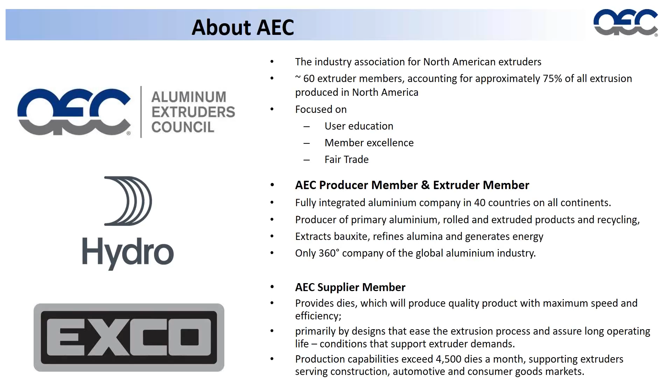Today's webinar is Introduction to Extrusion Dies, presented by Richard Dickson of Hydro Aluminum Metals USA and Rick Liscomb of EXCO Canada. Richard Dickson is Director of Customer Training and Development with Hydro Aluminum Metals USA. He has more than 30 years experience in the aluminum extrusion business.

Richard is an active member of the AEC's Die Committee and the ET Seminar Committee, which directs the program for the longest running aluminum extrusion technical conference, the International Aluminum Extrusion Technology Seminar. He also serves on several Aluminum Association and ASTM technical committees. Richard is the editor and co-author of Hydro's Die Design and Manufacturing Manuals. As leader of Hydro's International Die Team, for many years he drove the effort to create and refine ever more productive die designs. Richard's passions remain advancing extrusion beyond its current limits through understanding and education.

Combining extrusion and die design with the former Alcan, now Rio Tinto, and EXCO, a global designer and manufacturer of dies, Rick Liscomb has been part of the aluminum extrusion industry for 40 years. He has held various positions from janitorial through to upper management. The die side of his career has ranged from production design through to many die development teams. Rick has also been an active member of the AEC and has served on AEC and ET seminar committees.

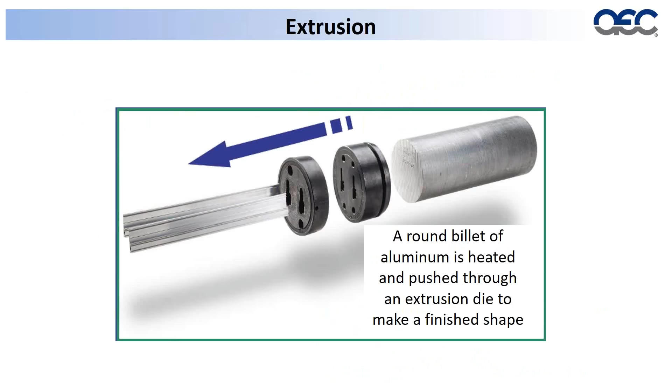Extrusion, meanwhile, is a relatively cheap initial setup cost. The die can be just a few thousand dollars, and you can have a prototype on your desk within a week or so - much quicker, much simpler than roll forming. But its great strength is it allows you, the end user, the architect or the engineer, and people in the industry using extrusions, to use your full three-dimensional creativity.

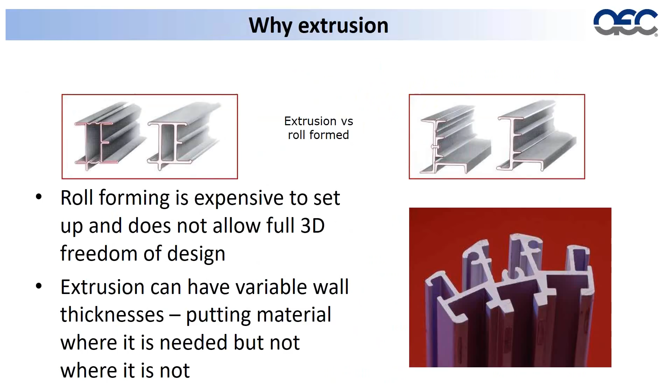It can also open up your creativity. Here is a group of extrusions designed to all slip together. Drilling a few screw holes means you can make a very strong, structurally sound component from interlocking extrusions. This again reinforces the ability of the end user to use three-dimensional creativity to produce the end product.

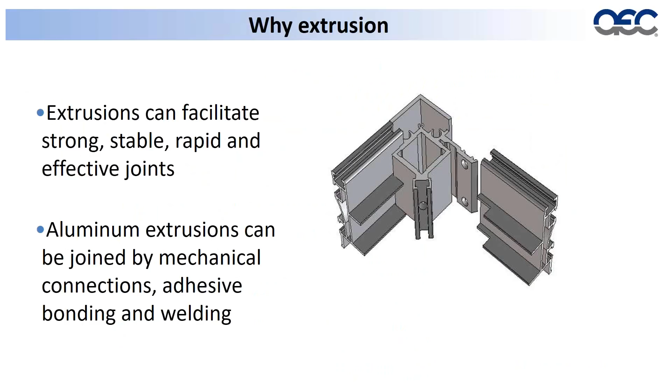Aluminum can also be joined in many ways: mechanical, adhesive, bonding, and welding. So there are many ways to bring these structures together, and it really frees up the creativity of the end user. Let me show a couple of examples.

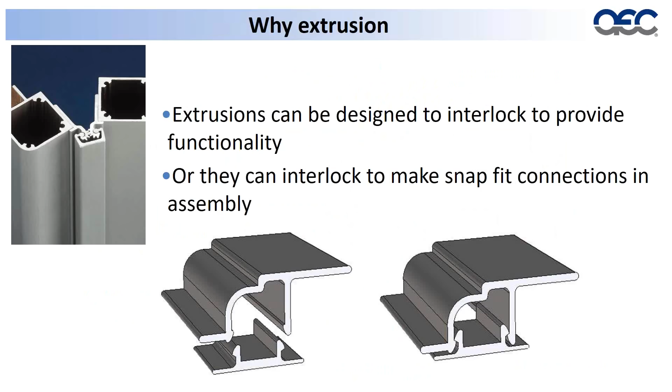So as we can see, the world of extrusion is changing more and more. Back in the old days when it was rod and bar, we had one system to use. Today, getting into more complex shapes, we really have to start changing our attitude and communication patterns to the way orders are placed.

Traditionally, what does a customer want? A customer goes to a purchasing manager to call the extruder, normally has a shape with a tolerance requirement, and the extruder gives the customer the product he wants to end with. Then over and above that, the properties and surface finish become a discussing point - what's exposed, what isn't, and whether they want close tolerances or special surface finishes.

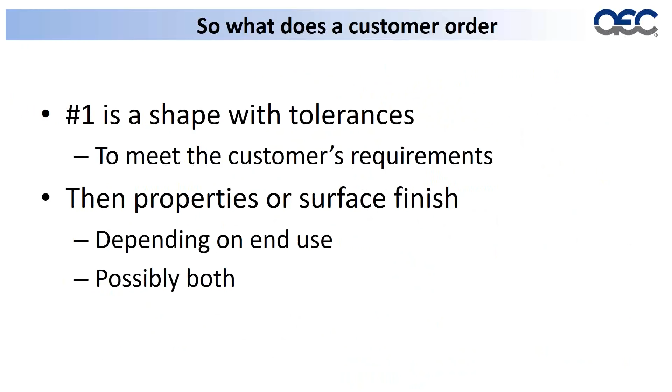Well, the problem today is when people order tooling that's out of standard, there isn't a possibility to communicate and improve it for both sides.

So really, what does a customer buy? Essentially the customer is renting the press time and the expertise of the extruder. Difficult shapes extrude more slowly - the more complex they are, the slower it can be, and the more time it requires. As we build in this complexity, the cost of the extrusion has to vary, because the extruder has to pay for his equipment, and nobody wants their supplier to go broke.

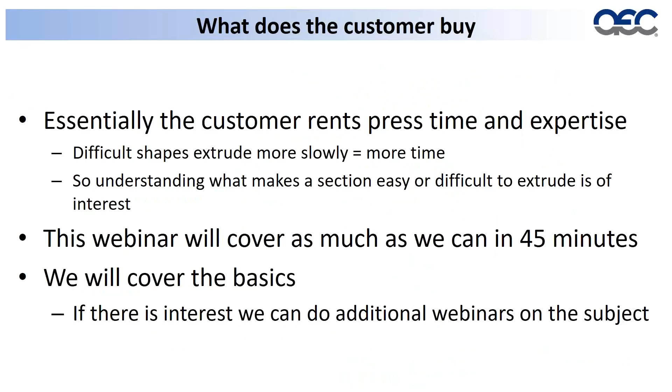Understanding what we can do to improve the productivity of a shape becomes a very important step in today's shapes. This webinar is going to cover as much as we can in 45 minutes, but as you can tell, that will be a limited amount. If there's a lot of interest for additional information, Richard and I would be willing to do another one that gets into more specifics and gladly see what we can tackle and help anybody with.

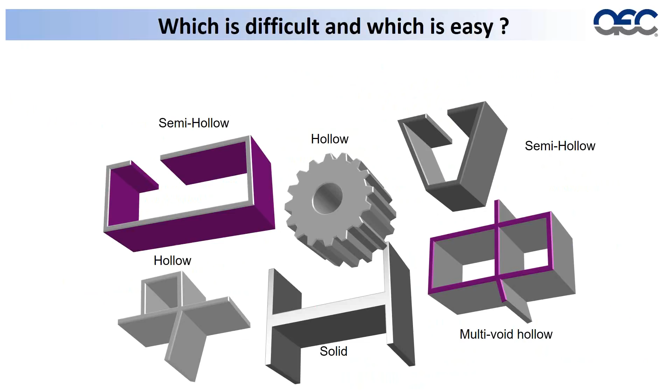Before we can get into determining which shapes are easy and which are complex, we have to know more about the dies and the problems that come from extruding non-standard shapes. Steel looks really strong and aluminum looks really soft, but it takes a lot of pressure to push aluminum through the die because of the reduction ratio from a very large diameter log down to the small, thin shape coming out the other end. When we look at the loads and temperatures involved, it's a different type of beast, and most people don't realize just how much variation there is.

Extrusion is like a tube of toothpaste. If you picture a tube of toothpaste, you put pressure on the end and a round rod comes out onto your toothbrush. If we change the configuration of the hole at the end, it would come out as whatever product we want.

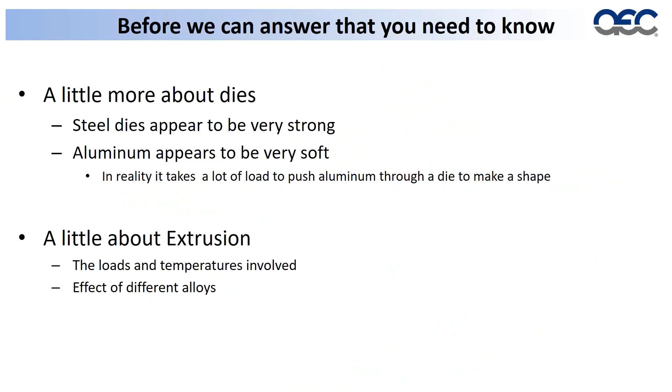Within the process itself, we have solid dies, which are relatively simple with much lower tooling costs. Then we have hollow dies, which involve a lot more complexity in the flow patterns, and the tooling costs are higher.

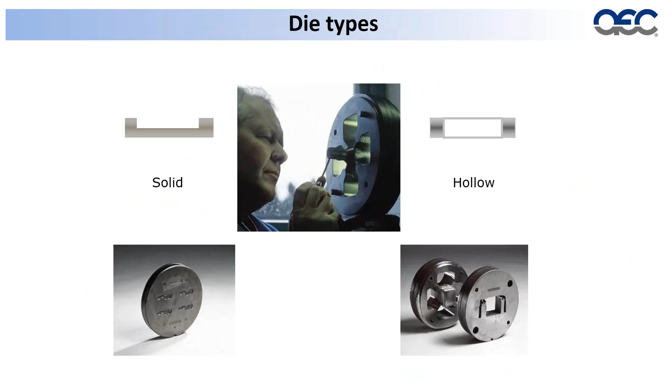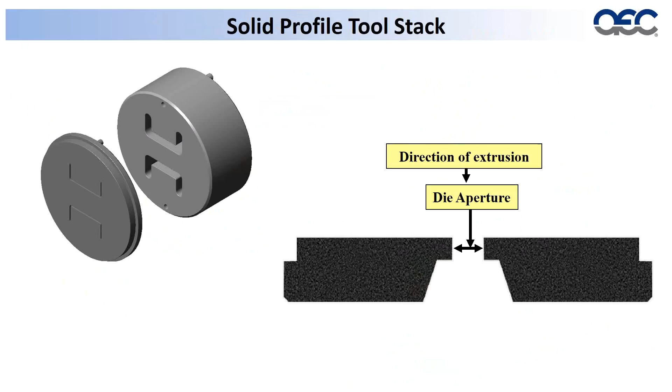When we look at solid profiles, the extrusion direction is from top to bottom. The aluminum goes through the die aperture, and as it passes through, it's rubbing on what's called bearing, which controls the velocity, because aluminum loves to stick to steel. That frictional work controls the velocity of different apertures or different size apertures within the steel, and that's essentially what you end up with: a solid shape.

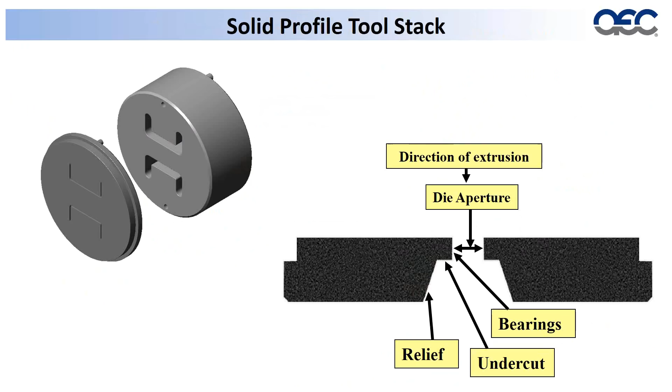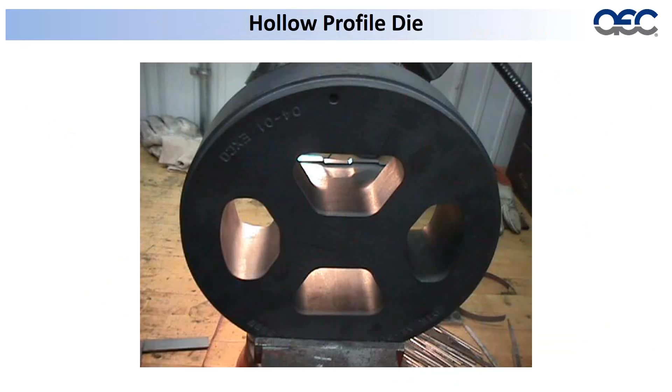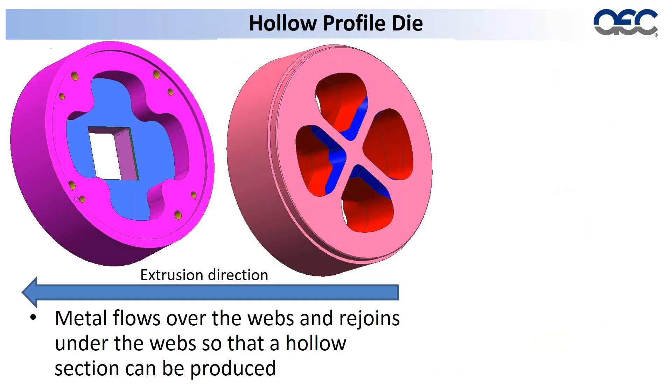When you look at hollow profiles, the dies become much more complex, as it's a three-step operation. The material must go through the ports, down along what we call bridges, which suspend the mandrel. The material meets together in a welding chamber prior to the aperture, adheres to itself, and then extrudes out over the suspended mandrel and the die plate, which forms the outside of the shape, both sides having bearing. It extrudes out and you end up with a hollow section, with the open part in the center being relatively any configuration you want, but it takes a slower extrusion speed and a lot more pressure.

As Rick says, there's a lot of work going on here. The metal goes over the web, through the ports, then is joined together again under the bridge and arm, and goes through another die plate, which has the mandrel on the outside. So you're starting with an 8 or 10 inch diameter billet, squeezing it through these small holes, and it takes an amazingly large amount of force.

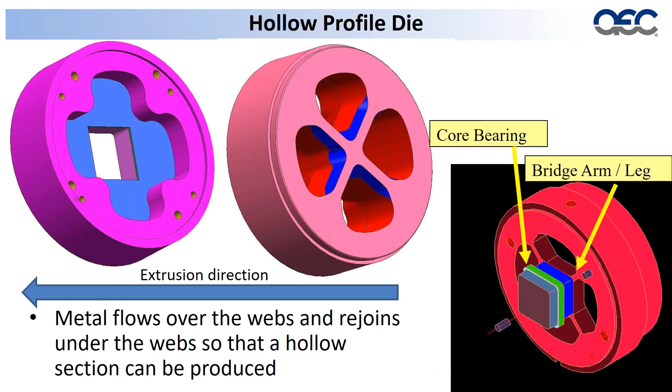Most people have at some stage in their life iced a cake. You'll notice when you're making big stars that look like Hershey's Kisses, it's easy to squeeze the bag. But when you're making fine piping that says happy birthday daughter or happy birthday mum, you have to squeeze the bag a lot harder. Extrusion's the same: the smaller the shape you're squeezing down into, the more force you need to apply.

I want to give you an idea of the forces involved, because we have to set the environment in which the die lives. The die is loaded very close to its yield strength, to its breaking point. It's hot - the aluminum is up in the 800s, the die is in the 800s Fahrenheit, and the pressures can be enormous. I'd like to look at the loads on this die in extrusion so you can understand some of the challenges. Rick will then take this into some practical implications in some extruded sections.

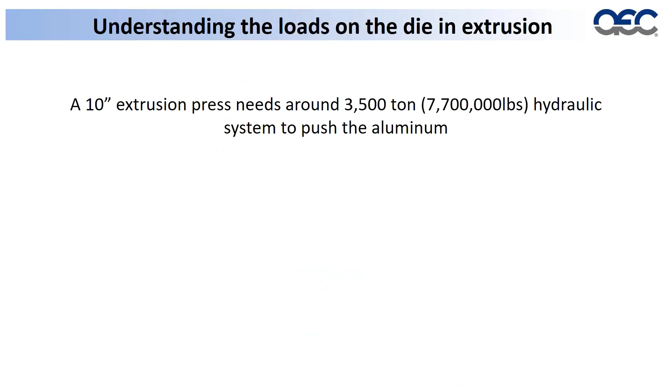Let's look at a press that extrudes a 10-inch billet. One of these presses normally needs about 3,500 tons of hydraulic force available to push aluminum through the dies, and it also has to be pushed through the container, so there's a lot of work to be done. That's 7.7 million pounds of force being applied to this process. I want you to get an idea of the scale.

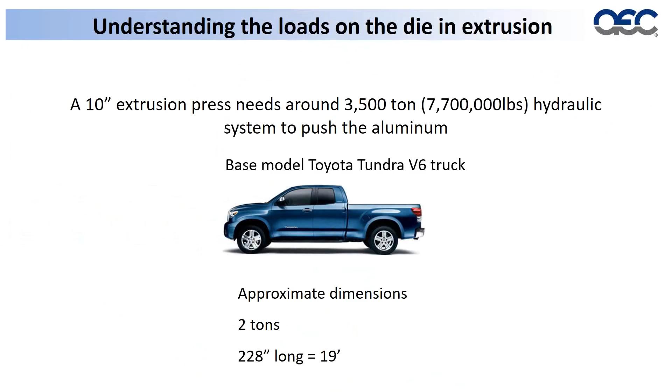To bring it into something we can feel rather than just hear: consider a base model Toyota Tundra V6 truck - it weighs about 2 tons and is about 19 feet long. If I want 3,500 tons of Toyota Tundras, that's a traffic jam of 5.7 miles of Toyota Tundras bumper to bumper. I want you to mentally envisage 5.7 miles of V6 Toyota Tundra trucks bumper to bumper.

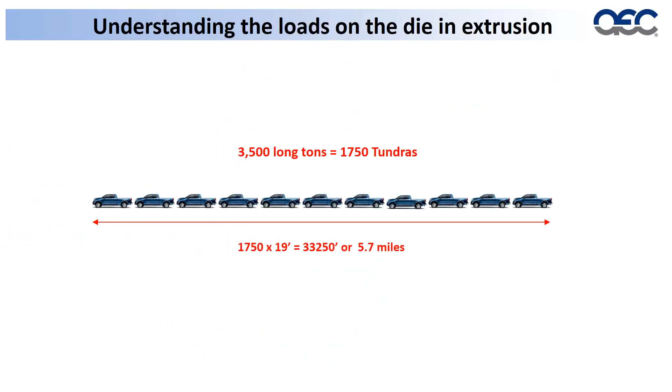Now let's put them on their ends, sitting on a 14 to 15 inch sheet of steel. That is a lot of force.

5.7 miles is 33,250 feet. That means that stack of Toyota Tundras you can see there is actually a hazard to aircraft in cruise, that's how high it is. So now, in your mind's eye, think of that crisp morning when you've looked up and seen the contrails of aircraft flying at altitude over you. Now imagine a stack of Toyota Tundra trucks that go all the way up to those contrails. This is an enormous load, and it's all sitting on a 14-inch disc of steel.

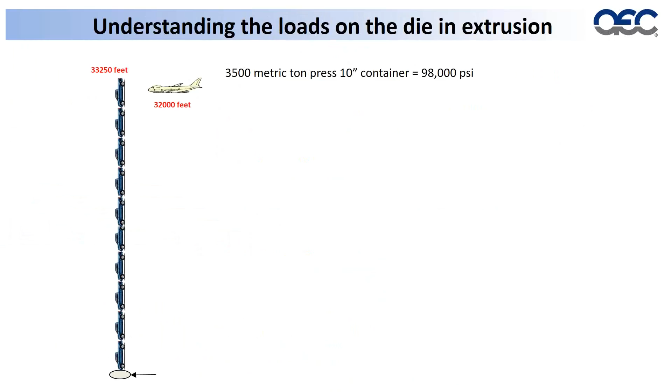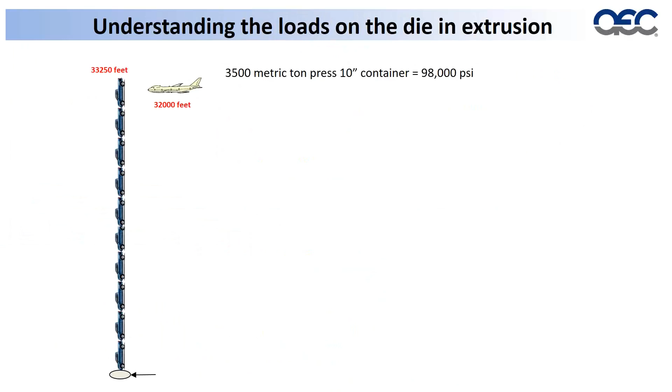The end that's pushing, the stem that's pushing that 3,500 tons, is actually nearly 100,000 psi of pressure. We're actually loading the stem, which is pushing the system to almost its limits as well. So extrusion is operating very close to the operating limits of many of the components. We're pushing the system as hard as we can to get the most complex and thin-walled sections we can.

So behind the tooling - oh dear, this is moving slowly. It will get there in a moment. There we are. If we imagine this stack of Toyota Tundras sitting on top of the die on its own, a simple 1-inch, 2-inch sheet of H13 steel just is not strong enough to take this load.

We put what's called support tooling behind it. Just to realize - I'm sorry to interrupt here for a second, but it's very important that we realize these dies are made out of steel called H13. H13, the H stands for hot work. If the temperature is not controlled properly on this steel, then it's not really the best steel for this situation. But because it's continually being introduced to heat, it has the ability to deflect and come back nicely without breaking. So this steel is pretty good for this purpose.

And even though it's extremely strong steel, it requires support. I'm going to try and make a mouse appear on the screen. And the part the mouse is pointing at now, the brown area, is the back die. This is a method of keeping costs down. The tool stack has to be a fixed size, and we don't want to make the whole die with a complex manufacturing process. So we make a thing called a backer, and I'll show that in another view in a moment. Those fit inside a die ring. This die ring is also an opportunity for us to use slightly smaller diameters, so less steel where appropriate, and give us the facility to use larger pieces of steel where we need it.

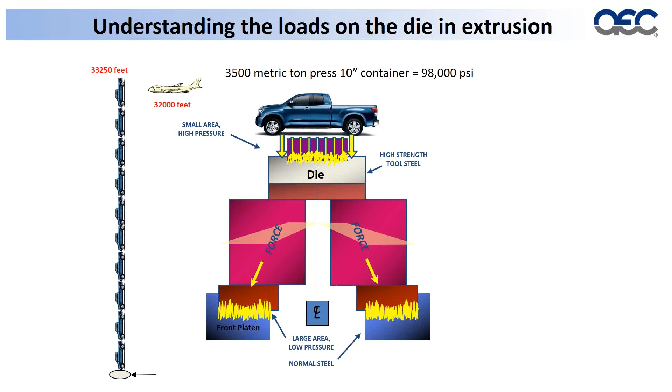The reason I'm showing you all this and wanting to talk about trucks and things is I want you to understand the load on the tool stack is very high. It is very close - in many cases, the dies are loaded close to their yield. And since we want the die to be the same size after extrusion as before, to use again, we don't want to yield the die. Now, Rick's going to talk to you about some elements of the design, such as tongues and screw lugs and things that you all want out there to make your sections work perfectly. But they become challenges because these loads are so high.

I would like a dollar for every customer that said to me over the years, 'Oh, but this is tool steel, you can't break that.' I have seen boxes and cases of broken dies where people have been a little over adventurous. So it is possible to break them because these loads are so large. And actually worse than breaking them, just deflect them a little bit so the shape doesn't come out as you want it. Because as Rick said, the number one thing you're ordering is the shape. It doesn't matter how pretty it is or how strong it is if it's the wrong shape. So getting the shape there is very important.

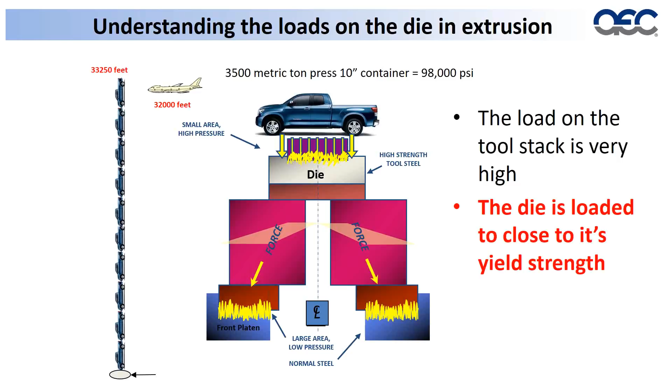If you take a look at the way this tooling is designed, the thing you notice is you have immense pressure on the front face, and then each part behind it gets bigger and bigger. What that does is increase the amount of contact square inches so that this pressure can be dissipated out to the press at the very back end, because nothing will withstand direct 98,000 pounds per square inch pressure right on its face—it'll push right through, the same way the live end of a bullet gets pushed out through a barrel on a gun. It's got to be dispersed, and the square inches increased so we can dissipate it.

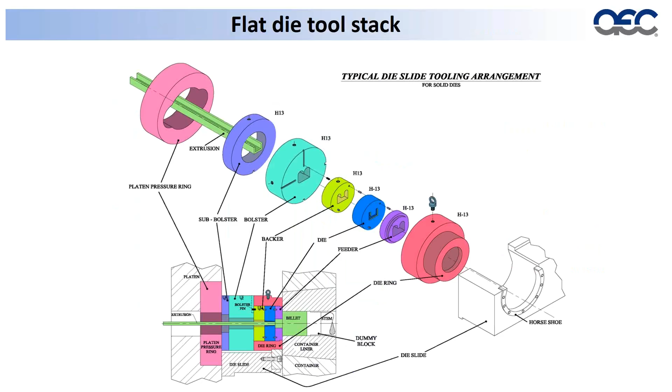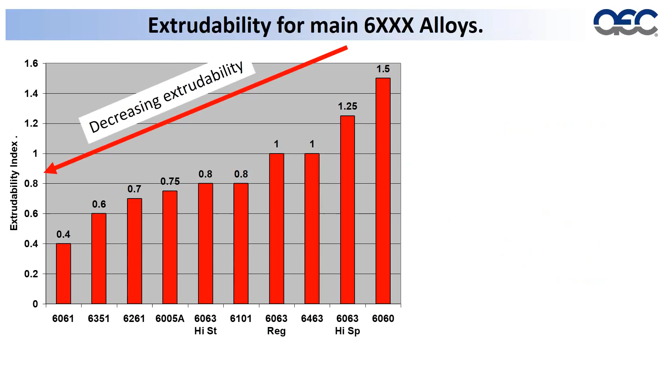The next thing that comes into play is the effect of alloys. This graph has the common 6000 series alloys, from 6060 on the right through to the strongest, which is 6061. In fact, there's also 6082 as a possibility, even slightly stronger. The important thing to know is as that material gets stronger, going left, the extrudability is decreased.

This is a big issue because, as Rick says, as end customers, what you're buying is press time. If the extrudability is decreased, then the product per hour is reduced and you end up renting more press time. So it's a direct cost. I encourage you not to use things that are stronger than you need.

I had someone recently contact me and ask if I could help him make a seat rail for a car. A simple U-channel in 7075, a very strong alloy used for making wing spars in aircraft. I explained that a 6000 series alloy would extrude at several tens, if not hundreds, of feet a minute, whereas 7075 would extrude at several inches per minute. Therefore he would be paying for 100 to 150 times as much press time for his components. He then very quickly decided that 6061 was a much better alloy.

So choosing your alloy wisely is important. Stronger alloys are harder to push. But the other thing we haven't introduced so far is that stronger alloys, when they come out of the press, leave the press at about 1000 to 1040 degrees Fahrenheit.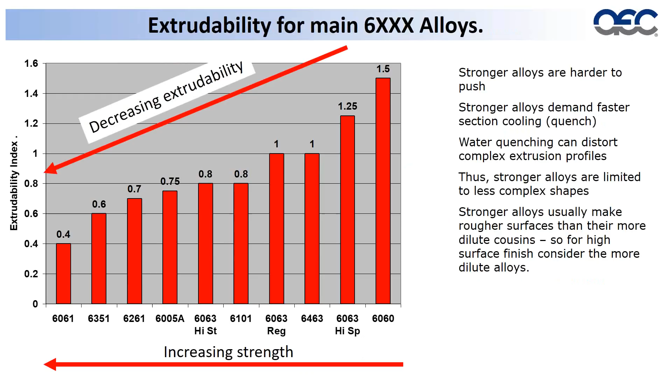For metallurgical reasons, for the strengthening of aluminum, it's important that they are quenched to 400 degrees Fahrenheit in under 1 minute. To do this, stronger alloys like 6061 are pushed through a water bath, and it cools it down fast. You can hear the fizz as it goes in, and the section gets cooled tremendously. The problem is the fast quenching in that water bath causes strong distortions.

So the stronger alloys are really limited to less complex shapes. If you want fine screw lugs and long, thin arms and nice architectural shapes, some of these stronger alloys just can't be done, because to get the strength they have to be quenched in water, and quenching them in water will distort the shape. So it's a little bit of a cat chasing its own tail.

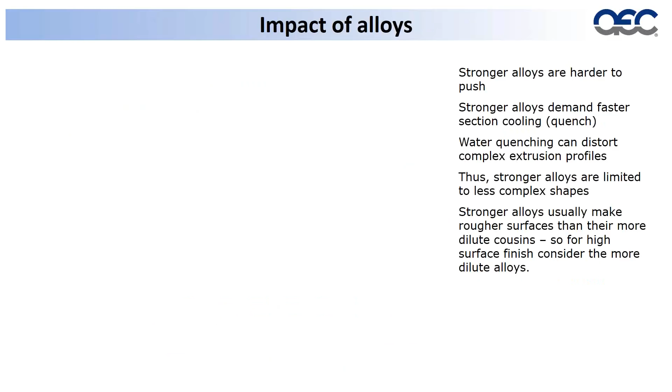Imagine running those through water, you'd have all sorts of problems. Those legs would deform and it would just not work. So for alloys with complex shapes and high tongue ratios, our choice of alloys is really quite limited.

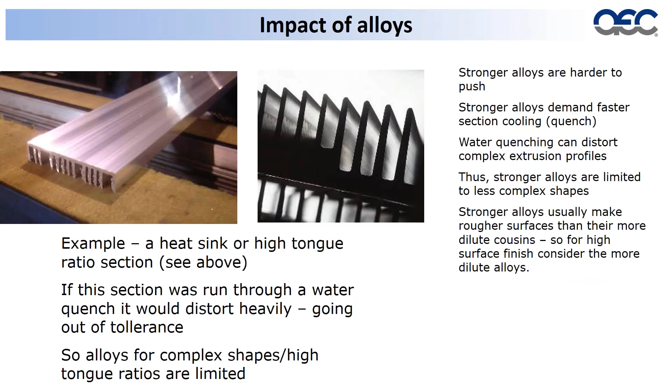When we talk about all these pressures and varying alloys and strengths, and everything that goes on, we have to remember these shapes must be extruded to tolerances about half the size of a human hair. Between flow variations, temperature changes, and deflection of tooling, we still have to handle things like plus or minus 4 or 6 thousandths of an inch, and that must be held over the complete length.

So to do that, we have to support and keep the bearings as perpendicular to the front face of the die as possible. When you look at the components of the tool stack itself, what we have is the die, which is the original shape-forming mechanism for the extrusion.

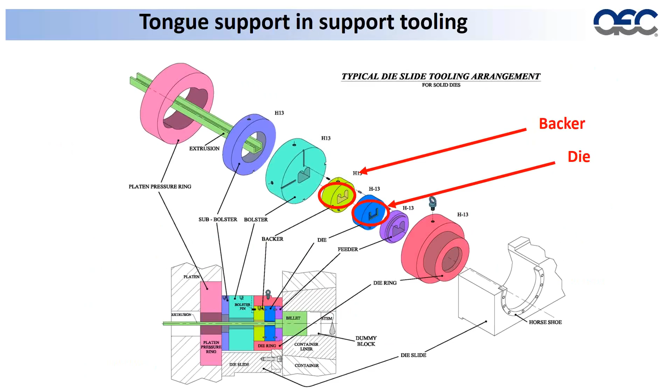We have the backer, which we like to get up inside of the complicated tongues to prevent them from pushing through or breaking or distorting. And in some cases, we actually have the bolster, which we run tongues up in.

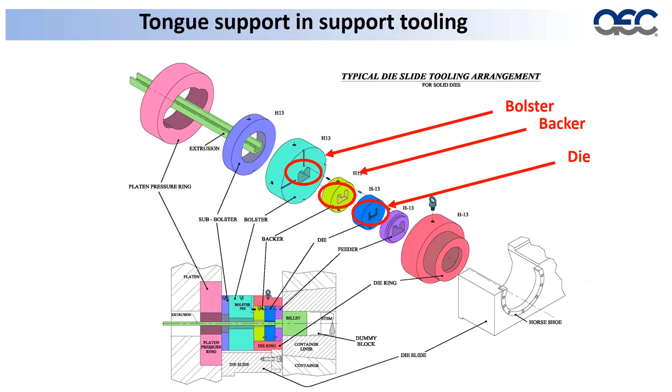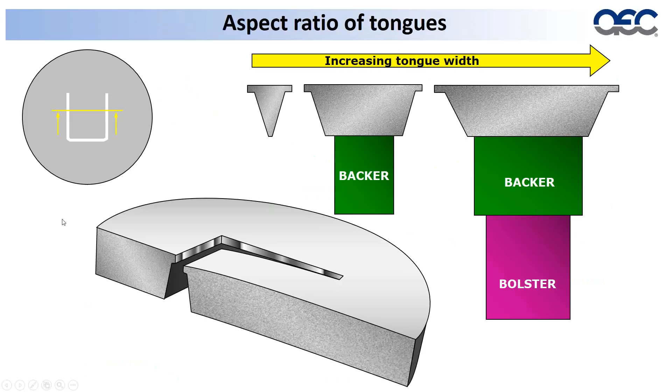The more support we have, the more consistent the extrusion is over the length of the billet. So if you ask for a very narrow, very long tongue, we can't put support into the die backer and we can't put it into the bolster. So that thin die plate on its own has to resist deflection on its own. One of the most challenging things you can make in extrusion is a long, narrow tongue.

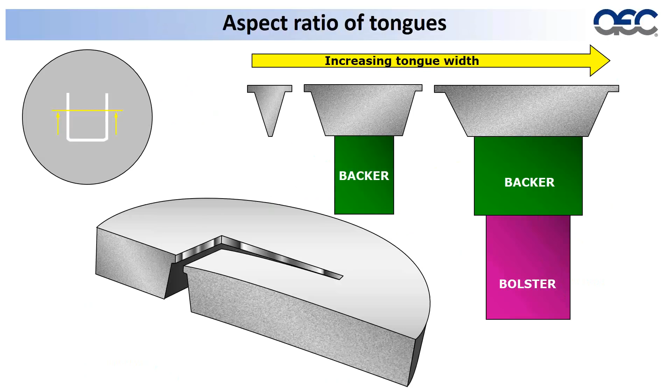One of the things we're going to discuss here is how we can design that out of the die by changing shapes a little to get you what you need as an end customer, but make it extrudable for us. And I think the one thing we forget to mention every once in a while is the bearing.

The bearing does form the shape and control the velocity, but behind the bearing there has to be some clearance because this flow does not necessarily go straight at the beginning, and if it touches the steel behind—the support steel within the die itself—it will adhere to that and simply plug the die and break, and that'll be the end of that particular piece of tooling.

So the things we have to realize is that the longer the tongue, the more difficult the extrusion. The narrower the tongue makes it extremely difficult because once again, we can't get support up in there to satisfy the requirements for this 98,000 pounds per square inch.

As we start to introduce cantilevered tongues, not only do we get direct caving in the extrusion direction, but we also tend to get twisting, which, as you can tell, the more you twist and bend, the quicker it's going to want to break. So the idea is to try and keep the root of the tongue as wide as possible so the depth does not get caught up and break the die itself.

What we're trying to do here is show you some things where small changes in the design can make the die much more extrudable. A much more extrudable die means more pounds per hour, which means to get your pounds you've rented less press time, which means your costs go down.

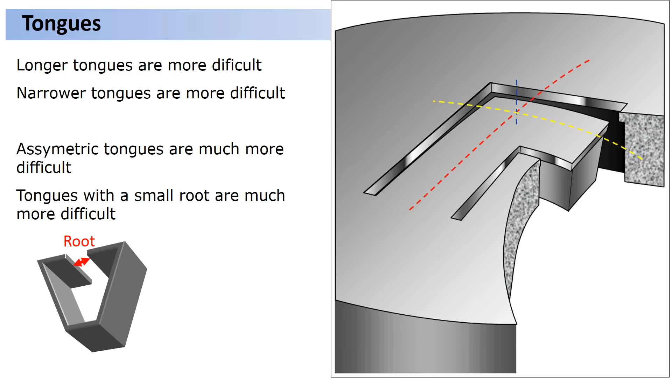So let's look at a couple of other general design principles. One thing we really don't like, and you as customers shouldn't like, is sharp corners. They generate more heat in the extrusion process, so they get hotter faster and limit productivity. The slight rounding of a corner, even just a little bit, will actually reduce the amount of heat generated locally and allow the section to run faster, which means you're renting less press time.

But the truth is, the aluminum will extrude around or on that corner. Whereas if we make a sharp corner, because of the frictional contact of the aluminum to the steel, it will actually freeze in that corner and set up and shear on itself. So you'll end up with a much bigger radius by actually making the corner sharp.

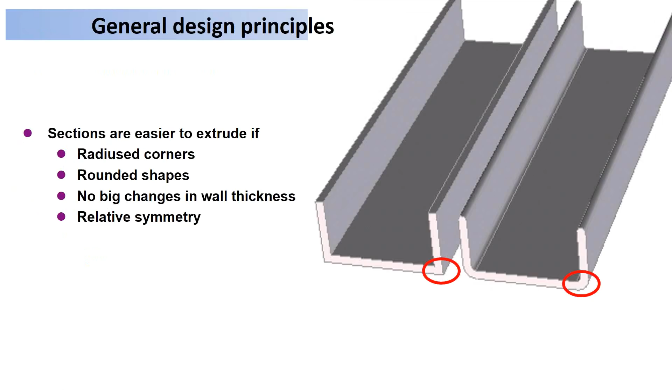Before we get too far into that, though, which is actually I think the key part of what we're going to talk about, if we get our communications right, I think everybody can be satisfied at the end of the day, and we can get an excellent product through teamwork. We've got two examples coming up in a minute. But one more example here.

So in the right hand of these two sections, that streak on that surface would actually be a problem, because that's going to be visible. There are ways we can approach it, but in general we end up reducing the productivity a little and increasing the complexity of the section when we deal with these things.

One of the ways around this is, here's a section where the screw lug has been put on non-visible surfaces. The circle is the visible surface, and instead of putting the screw lug behind the visible surface, it's been put behind the non-visible, so the streaking doesn't matter.

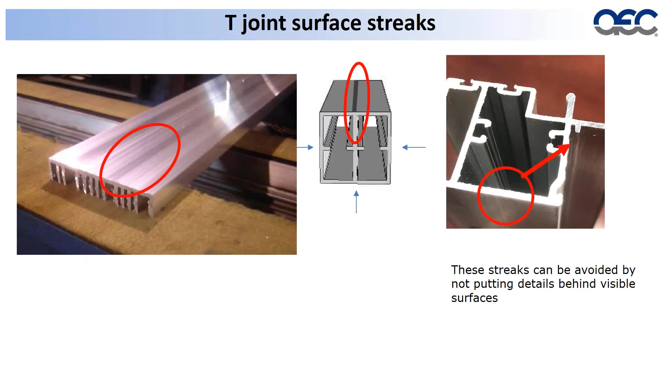It's amazing the number of times I've spoken to customers over my years in the industry and said, do you really have to have that screw lug on that face? You can't put it on this one? And the customer says, no, it's fine, put it on there. And we greatly reduce scrap, which is waste, and waste is, of course, cost. So considering where you put screw lugs and legs is really important.

And if you absolutely have to have the leg behind a visible surface, what you can do is use decorative lines. You see here what we've done inside this lower red circle is put 4 or 5 features into the extrusion, and these hide rather nicely those issues that are going on behind.

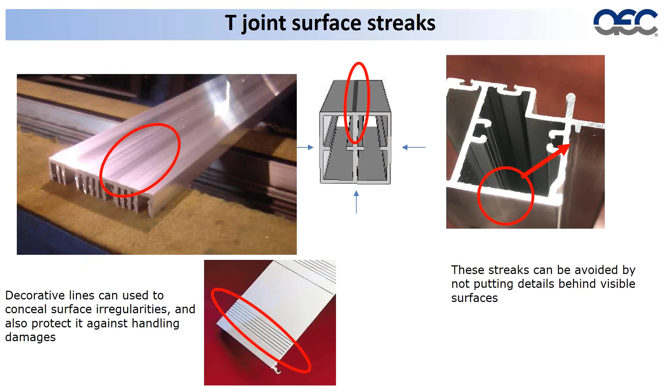So there's lots of things, but as Rick said, we have 45 minutes and we've eaten up quite a bit of that already. We'd like to give you 2 practical examples of things that have been done.

So here's an extrusion that comes in as a hollow with 2 mandrels and a fairly deep tongue. And as we look at it, the one on the left, what this says is that, number one, it's going to make the extrusion difficult because the large masses, the whole of the aluminum will want to go through the place of least resistance, which would be the large mass. With 98,000 pounds per square inch pressure, it can shift the mandrels up in the upward direction.

But most importantly, what it says to me is that somebody is going to do some machining on this mass after they've received the extrusion.

The question is why? We're going to be manufacturing a custom shape to satisfy the customer. So if perchance it happens to be a bolt head or a screw head that's going to go up in there, if you look on the right-hand side, you'll see that we've built the head for the bolt right inside of the extrusion. We've also balanced out the flow of the aluminum on any side of the mandrel. We've reduced the complexity quite a bit. And at the same time, we've made the cost of the material less because we've reduced the weight.

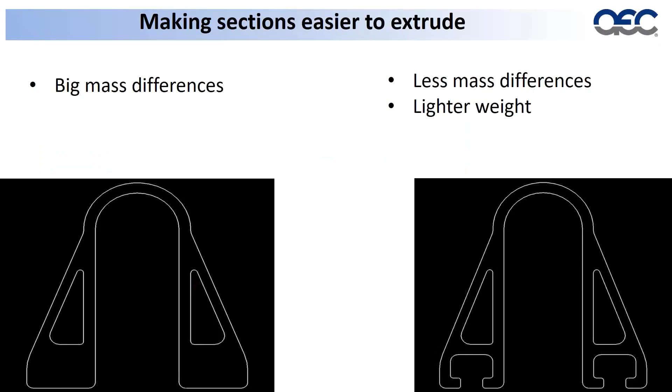And most extrusions are sold by the pound. So number one, we've reduced your cost, but number two, we've also made it so the extruder can have a better chance of delivering you good material all the time.

If perchance the screw is more of a screw that has to go in vertically instead of horizontally, we can put a screw detail in this way, whereas you can actually put a screw in through the cap into that screw lug. You get good contact around most of the shape, and the gap itself is the only place where the thread won't catch. And before you know it, we've reduced the weight. We've made the tongues easier, and we've made the functionality of the thing satisfy the customer.

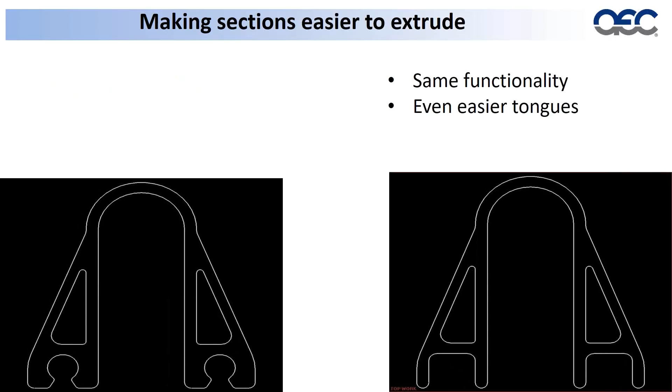Now, at the same time, we can look at the next shape, and we can see that in this particular case, if nothing was going to happen there, we can simply take a cut out of the extrusion and simply reduce the mass by adding a channel there and having 2 small legs that can sit on whatever the base piece is that's required. Again, easier tongues, less chance of breakage, metal thickness is uniform all the way around, and before we know it, we have extrusion consistency, which leads to customer delight.

Now, other options we have is we can increase the mandrel to get the wall all the same. It's still not necessarily the prettiest of extrusions, but it's still got hollow pricing, which the tooling's a bit more expensive. But certainly, as you can picture this material cooling, because of the consistency in the wall, it's going to cool straight. We're going to hold the tolerances over the long length, and before we know it, everybody will be happy and it'll do its job.

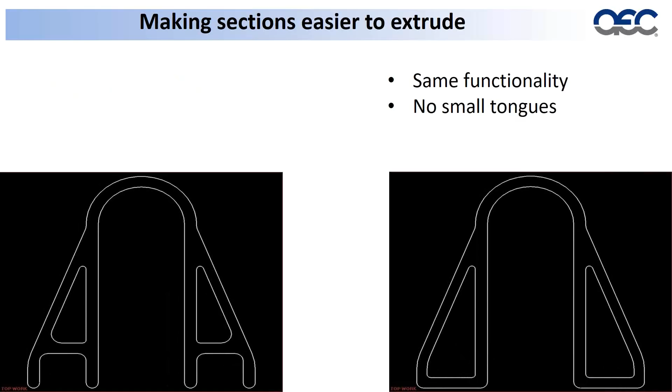Now, if we want to turn around and save this thing, instead of the one on the left, which is a hollow, what we can do is take a look at the true application and modify it as shown here. And now, not only have we made the extrusion better, but we've also reduced the tooling cost because now all of a sudden it's a solid section. We can put a backer up inside of it to give it all the support it needs. We've really reduced the weight because we've taken a lot of the other metal out.

And if that satisfies your needs, then everybody's happy because the extruder has a higher percentage of saleable material per billet, and the customer gets quite good tolerances and lower tooling costs. So these are the things that in today's shapes we have to start doing: bringing in the engineering group, and if need be, bring in any other experts in the field.

There's a good example Rick's given, where communication between a die maker, extruder, and customer can actually optimize the shape, reduce costs by increasing productivity, reduce costs by changing the die type, and reduce costs by changing the amount of aluminum present, but not in a way that's detrimental to either party. So this is a very good thing to do.

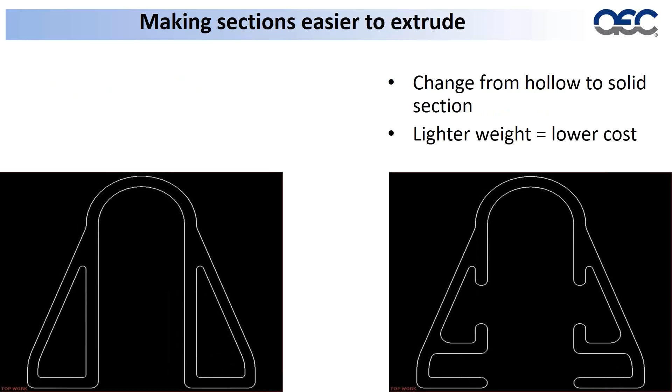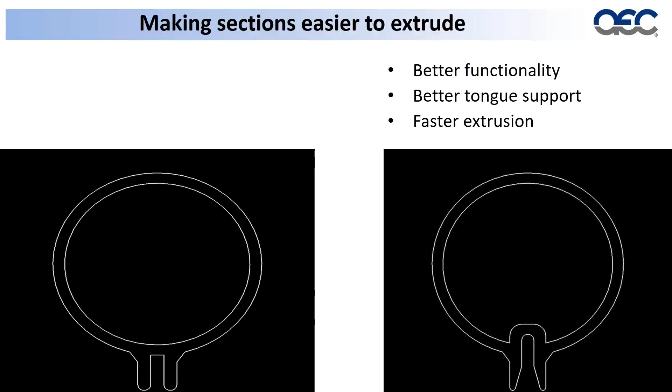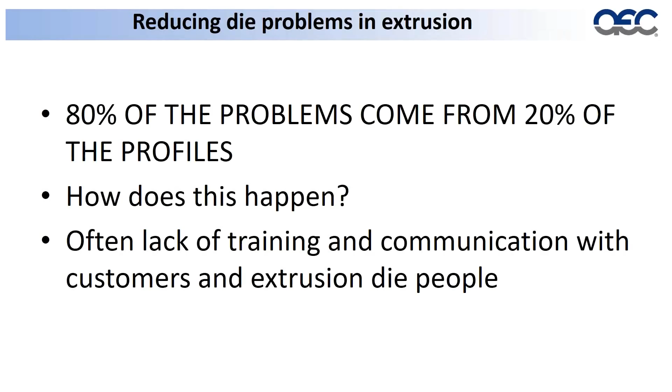But the most important thing we can do, and I really emphasize the word important, is get the customers to discuss what's going on with the salespeople and the internal group in the die shop. So the discussions should take place between the die shop and engineering, sales, production people, and fabrication people—those fabrication people may be within your facility—so we can point out all the probabilities and possibilities of future problems before we get into true production. There's no sense saying, 'oh, we should have done that earlier.' Let's do it now. Let's just satisfy everything up front.

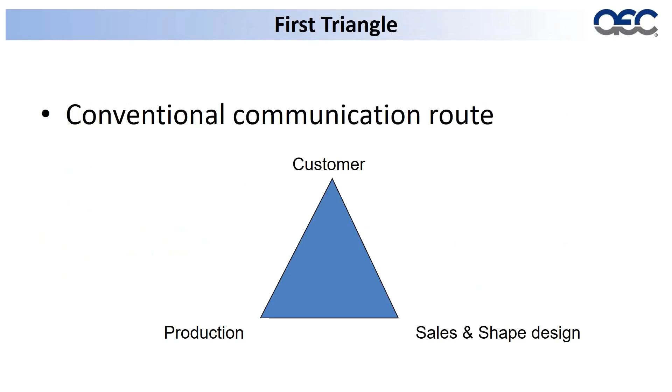Customer delight means that the extruder is happy too, and before you know it, we don't have any problems, and we just keep moving on.

It is such an easy thing to do. The only thing it takes is time, and believe it or not, a couple of hours up front at the beginning is a lot better than hours and hours per day at the end.

I was once called into an extrusion plant to try to work out why they were losing their shirts making a particular product. It was a huge volume. And we analyzed the die.

Several of us looked at the die, and we'd actually got a really complex element with some mandrels inside the die. When we got to the end of the long story of investigating this, the extrusion plant salesperson had actually suggested it. That complex set of mandrels was making it very difficult to extrude, which kept the productivity down and was really hurting the cost for everybody, customer and extruder. It was a nightmare situation.

Had we had the conversation Rick suggested, drawing in the die people at an early stage, everybody would have been very happy, and it wouldn't have ended up being quite the troublesome situation we had.

I think the things that we have to realize is both the customer and the extruder have to understand what's expected. Communication is the best way to do it. If the extruder knows what the end use is, then he can do his contribution.

If the customer understands the impact of a small change and how much of a benefit it is to the extruder, then all of a sudden we're happy. And flexibility and the shape design can happen before it starts. If we catch it before there's any costs, then we can make it so that everybody's happy.

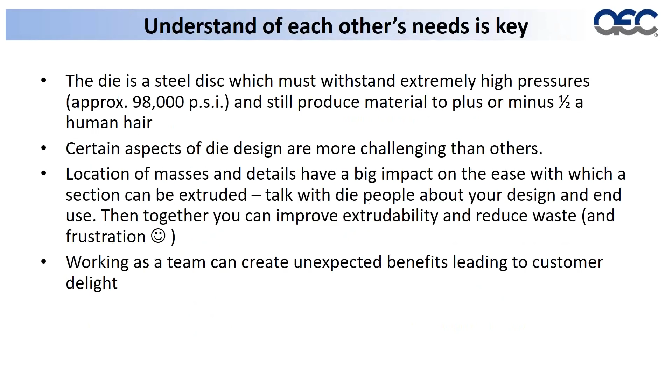And it's kind of interesting. It's a lot like having a webinar and having the phone system go out about 2 minutes before you're supposed to be on the air. If you don't land on your feet, you're in trouble.

But it's a great little car if you ever get a chance to drive one. If you happen to have an extra $200,000, you could probably buy one. It's not quite that bad, actually, but it's not a supercar.

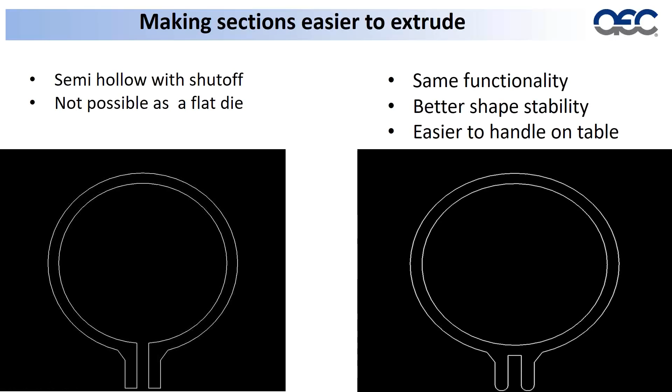And the previous question was about things distorting on the table. You want something to distort on the table - that one on the left there is the king of all distorters. That's why we suggest the improvement of making it not a shut-off die, but a normal hollow die, and then you don't have the problem with that gap opening and closing. What happens on that die is the outside of the shape cools very quickly in the atmosphere, and the center portion retains all the heat, and the only place it can show any movement is in the gap.